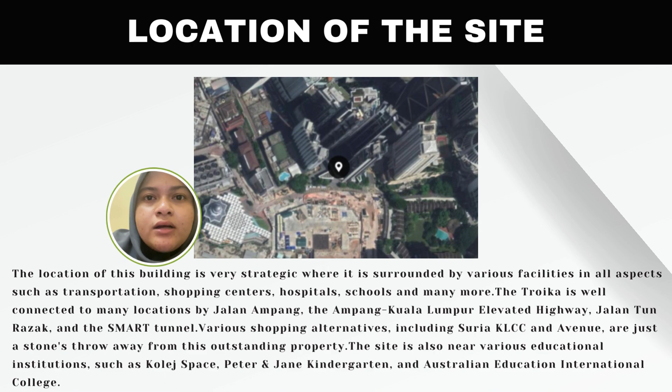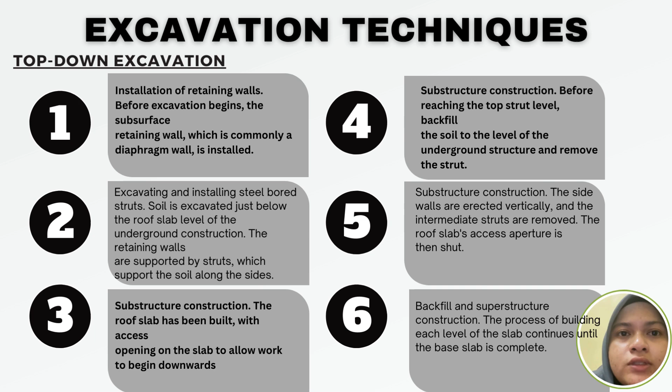For the Troika excavation techniques, we use top-down excavation, which firstly involves installing the retaining walls, then excavating and installing steel bored struts, then construction of the substructure. Following this, the roof slab is built with access openings on the slab to allow work to begin downward.

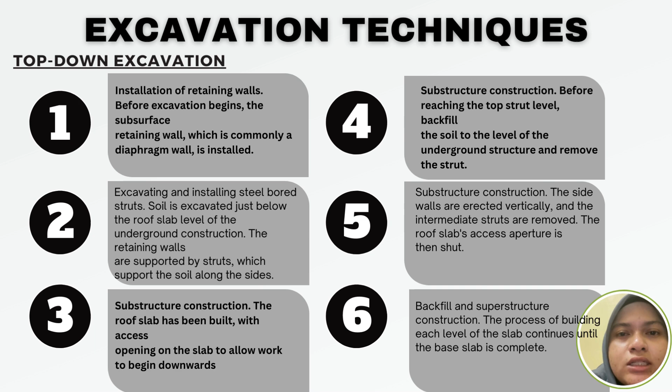Next, for substructure construction, before reaching the top strut level, backfill the soil to the level of the underground structure and remove the strut. Next, the side walls are erected vertically and the intermediate struts are removed. The roof slab's access aperture is then shut. Lastly, backfill and superstructure construction take place. This process of building each level of the slab continues until the base slab is completed.

The Troika Towers in Kuala Lumpur, designed by famous architect Norman Foster, contain innovative waterproofing systems critical to the structural stability and durability of the structures. Given Kuala Lumpur's tropical rainforest climate and heavy rains, strong waterproofing techniques are required. These systems likely involve a number of strategies specific to different areas of the structure.

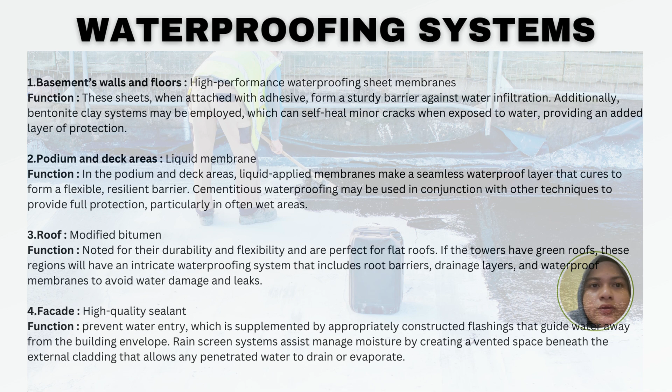For the waterproofing system at basement walls and floors, we use high-performance waterproofing sheet membranes. At the podium and deck areas, the tower uses liquid membrane. For the roof, modified bitumen is used, and at the facade, high-quality sealant is used.

The HVAC system efficiently maintains temperature and air quality throughout the facility. For ventilation, the Troika Tower most likely uses both natural and mechanical ventilation. Natural ventilation could be improved using architectural components such as movable windows and balconies that encourage airflow.

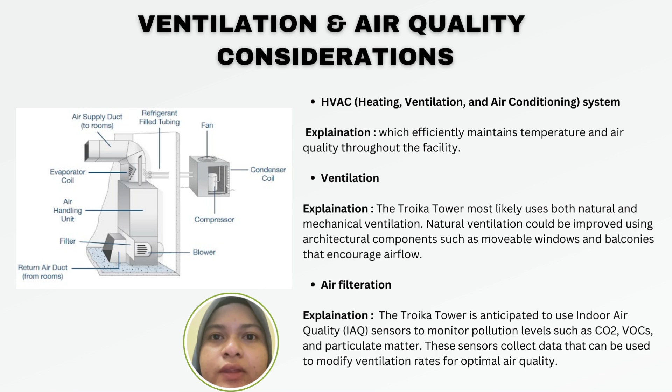Next, for air filtration, this tower is anticipated to use indoor air quality (IAQ) sensors to monitor pollution levels such as CO2, VOCs, and particulate matter. The sensors collect data that can be used to modify ventilation rates for optimal air quality.

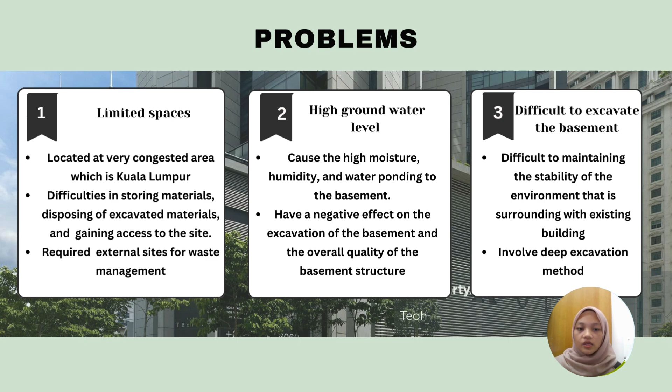The last problem is difficulty excavating the basement. It is difficult maintaining the stability of the surrounding environment with many existing buildings nearby. It also involves the deep excavation method and a lot of effort.

Okay, let's move to the solution. The problem of limited space area can be overcome by doing proper site layout planning. Effective site design helps to maximize the utilization of the available area, ensure safety, reduce the chance for delay, and reduce disturbance during construction.

Next is installing a waterproofing system. It can help overcome the problem of high groundwater level. It is important to install a waterproofing system to avoid water coming up into the basement.

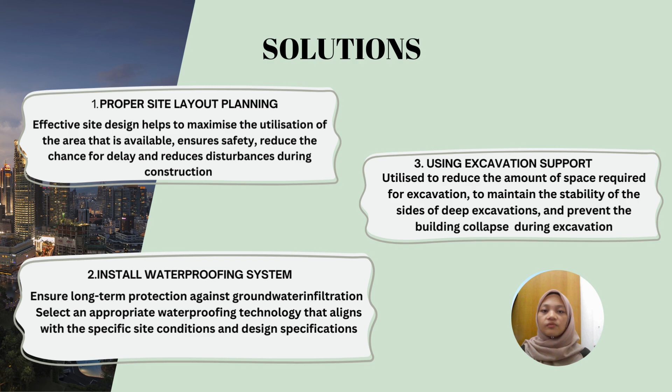Next is using excavation support, which can overcome the problem of difficulty excavating the basement. Excavation support is utilized to reduce the amount of space required for excavation, to maintain the stability of the sides during deep excavation, and to prevent building collapse during excavation.

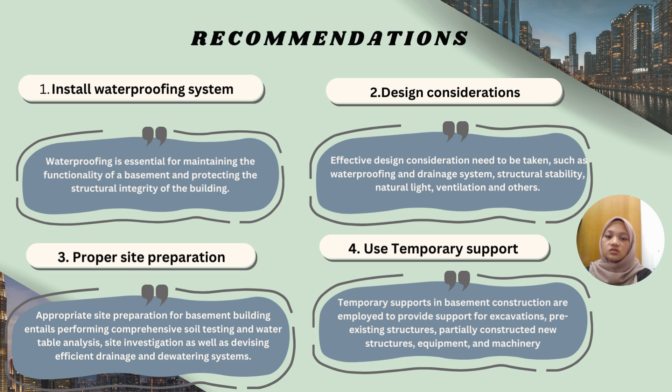Appropriate site preparation for basement building involves performing comprehensive soil testing, water table analysis, site investigation, and others. Lastly, I recommend using temporary support. Temporary support in basement construction is employed to provide support for excavation, protect pre-existing structures, and prevent collapse of the building during excavation.

This slide shows the location of the site, and this image shows the site layout plan. The project is situated in the Tun Razak Exchange (TRX) area, a premier financial district in Kuala Lumpur, Malaysia.

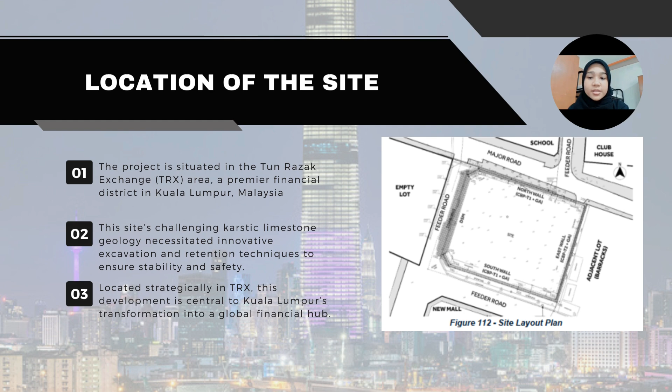This project involved the construction of the Exchange 106, one of the tallest skyscrapers in Southeast Asia. The site's challenging karst limestone geology necessitated innovative excavation and retention techniques to ensure stability and safety. Located strategically in TRX, this development is central to Kuala Lumpur's transformation into a global financial hub.

This slide talks about the excavation techniques. First of all is open excavation. The primary technique used to handle the site's complex karstic limestone geology was open excavation. Using this strategy, the site was carefully excavated in phases down to a depth of 16 meters, while continuing to be tracked to adjust to the very unstable and changing karst characteristics.

To maintain the vertical sides of the excavation and prevent collapse, a complete retention system including diaphragm walls and contiguous bore piles was built throughout, despite the difficulties involved with the geology.

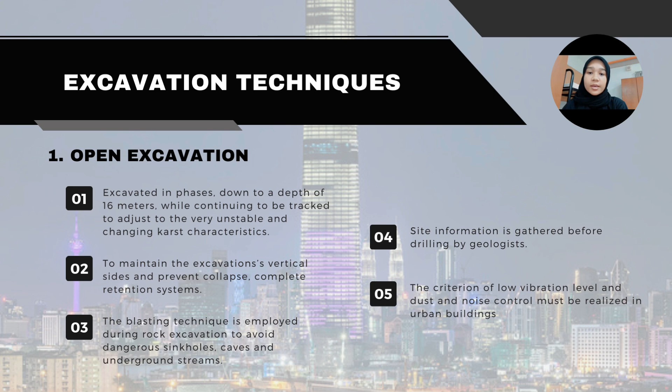Blasting technique is employed during rock excavation in order to avoid dangerous sinkholes, caves and underground streams. This method entails control blasting in order to fracture the rock without inflicting much damage on surrounding structures and unnecessarily inconveniencing the society. Site information regarding the subsurface conditions are gathered prior to drilling by geologists.

The second is about the retention method. For shallow rock heads and contiguous bore piles (CBP), a design involving deep soil mixing (DSM) was suggested. It was suggested that one uses CBP with obtainable ground anchors in situations where DSM would not be appropriate due to deeper rock heads and/or lack of space.

The application of DSM was reviewed where space was available on the west and south walls. To map the rock profile at these walls, sufficient rock drilling was done. It was determined that DSM is the best use for the west wall since the rock profile was less than 10 meter and more uniform. Since the rock depth on the south wall varied from 8 meter to 9 meter, it was determined that DSM would not be a good option.

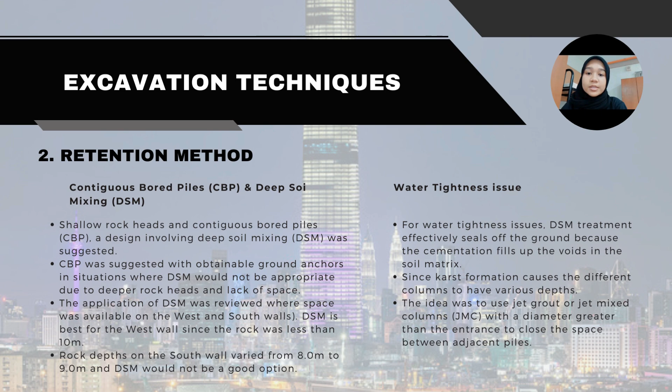For the water tightness issue, the DSM treatment effectively seals off the ground because the cementation fills up the voids in the soil matrix. Since the construction techniques, soil nailing was important in strengthening the excavation walls by driving steel bars and grouting them for stabilization of the slope and to prevent failures in the event of excavation slopes. Dewatering was accomplished by installing deep well points to lower groundwater levels and pumping equipment system to control groundwater levels.

Open pit methods were employed in the excavation process as in similar sites. However, the actual digging was done in benches to reflect the varying ground conditions at the site. Blasts were also used in the instance when the hard rock had to be broken to ease the digging process.

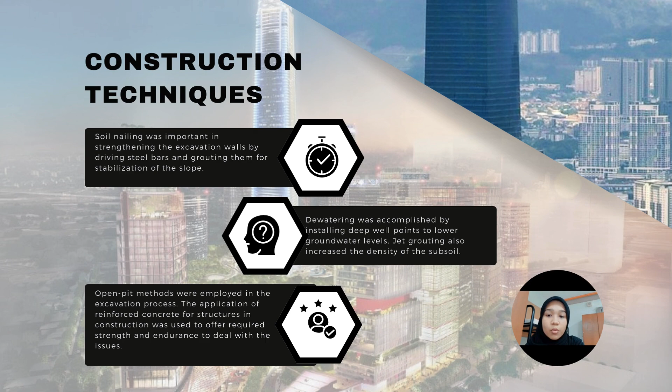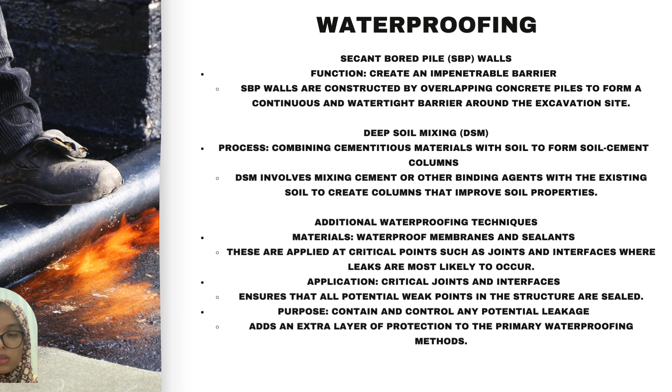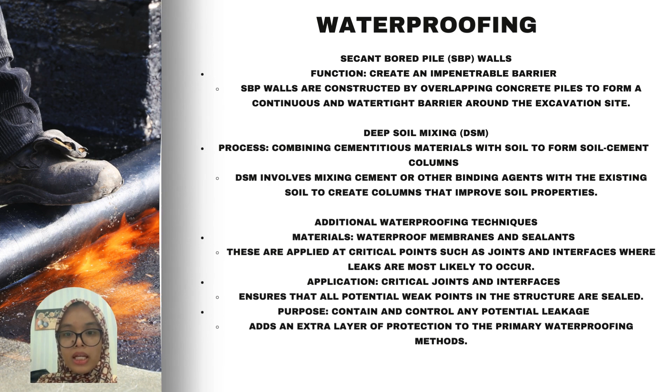First, waterproofing method. They use several methods to waterproof the excavation site effectively. The primary technique includes secant bored pile (SBP) wall, deep soil mixing and additional waterproofing technique. Firstly, they use SBP wall. This wall creates a strong waterproof barrier around the excavation site.

They prevent water from seeping in and provide crucial structural stability. Secondly, they employ DSM. This process involves mixing cement with the existing soil to form soil cement columns. This column stabilizes the soil and reduces the permeability, which is vital in preventing water leakage into the excavation area.

Lastly, they implement additional waterproofing technique to address any potential weakness in the primary system. This includes applying waterproof membrane and sealant at critical joints. These extra measures ensure that even the smallest leaks are contained and controlled.

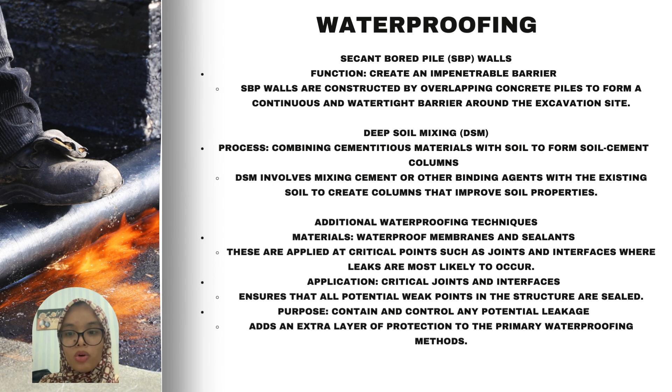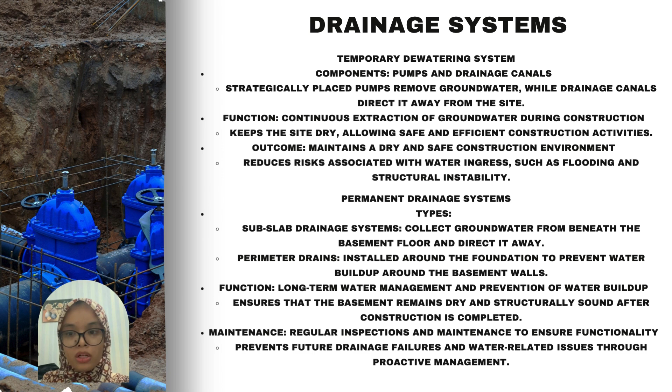Next is drainage system. Efficient drainage systems were crucial for managing groundwater and preventing flood. During construction, they used a temporary dewatering system with strategically placed pumps and drainage canals to keep the site dry. After construction, they installed permanent drainage system, including sub-slab and perimeter drain. This system continuously manages water to prevent any build-up around the basement, ensuring long-term dryness and structural integrity.

Next is the problem. They faced several challenges during the project. The geological variability of the karst formation made excavation unpredictable, with rock depth varying between 6 and 19 meters. Additionally, the high permeability of the karst limestone allows significant groundwater ingress, complicating water management.

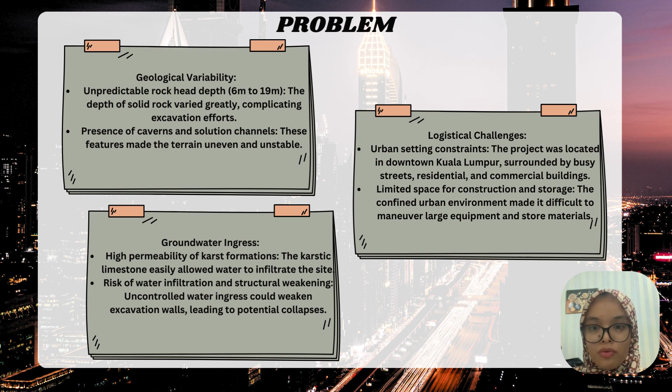Furthermore, the urban setting in downtown Kuala Lumpur posed logistical challenges. The site was surrounded by busy streets and buildings, limiting space for construction, operation, and storage. To address these challenges, they used a combination of SBP wall and DSM to stabilize the soil and manage water ingress. The SBP wall created a seamless barrier, while DSM reinforced the ground and reduced permeability.

The first solution is dewatering system. A comprehensive dewatering system with pumps and drainage canals was put in place to control groundwater level during construction. This system keeps the site dry and safe.

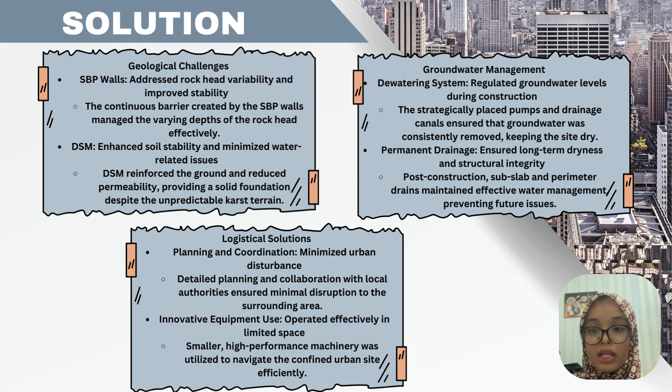Second, permanent drainage. Post-construction, they installed permanent drainage system to ensure the basement remains dry and structurally sound. This includes sub-slab and perimeter drain. Lastly, logistical solution. They also tackled the logistical challenges by carefully planning and coordination to minimize urban disturbance. They use smaller, high-performance machinery to operate effectively in the limited space.

Next, recommendation for improvement. First, enhance drainage design. Consider including a redundant drainage layer and backup system to ensure continuous water evacuation. Additional drainage channels and extra sump pumps can act as fail-safes.

Second, cutting-edge waterproofing solutions. Employ high-performance membranes and advanced sealants. Modern waterproofing materials and self-healing sealants provide greater durability and flexibility, effectively accommodating the variable nature of karstic landscape.

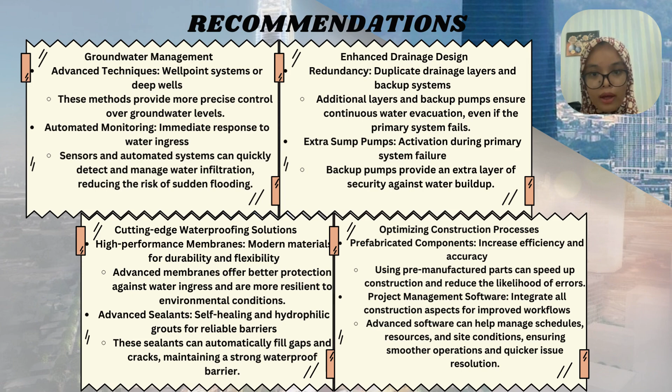Lastly, optimizing the construction process. They can use prefabricated components and sophisticated project management software. Prefabrication increases efficiency and accuracy, while advanced software helps manage all aspects of the construction process, ensuring smooth operation.

Okay, let me continue with the comparison between the two projects. As for similarity, the first similarity between the KL Karst and the Troika is both provide the same function to the main building, which is to act as parking.

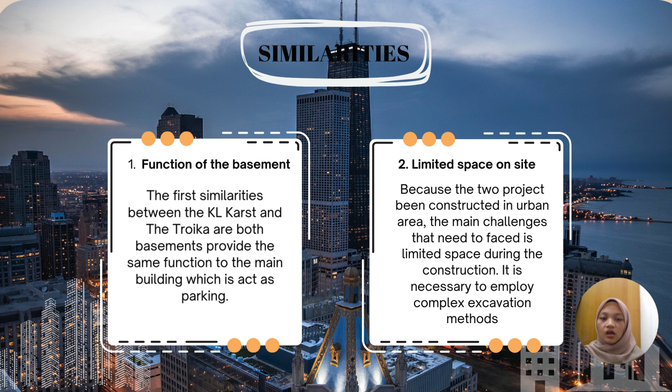Next is limited space on site. Because the two projects are being constructed in an urban area, the main challenge that needs to be faced is limited space during construction. The projects are required to employ complex excavation methods.

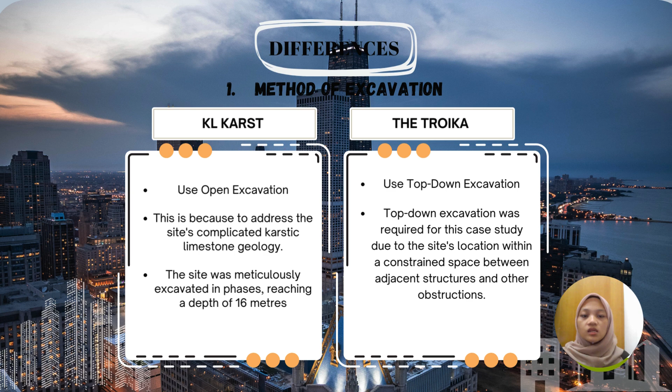Next, differences. The difference between KL Karst and the Troika is the method of excavation. KL Karst uses open excavation to address the site's complicated karstic limestone geology. Meanwhile, the Troika uses top-down excavation because the site location is within a constrained space between adjacent structures and other obstructions.

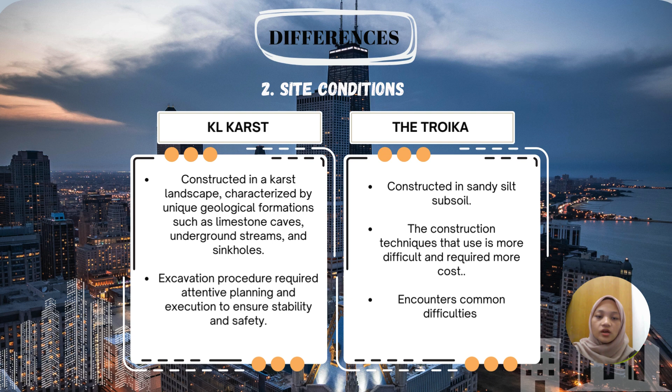Next, site condition. KL Karst is constructed in a karst landscape, characterized by unique geological formations such as limestone caves, underground streams, and sinkholes. Excavation procedures require attentive planning and execution to ensure stability and safety of the basement. Meanwhile, the Troika is constructed in sandy silt subsoil. The construction technique used there is more difficult and requires more cost.

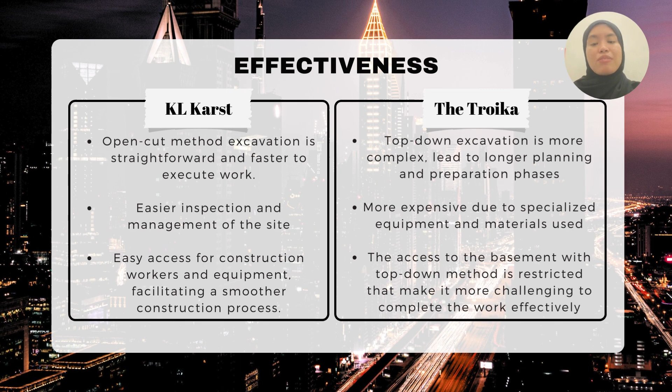I am Fatih Zulaika and I will be presenting the next topic, which is the comparison in effectiveness between the KL Karst and the Troika. First of all, the term effectiveness refers to how effective the method is, where we can see the successful outcome of the project from the best method or application used in the construction process.

From the KL Karst project, the open cut excavation method is used, which is more straightforward and faster to execute. It provides easier inspection and management of the site. Moreover, it has easy access for construction workers and equipment, which facilitates a smoother construction process.

As we can see from the Troika, the method of excavation used is the top-down method. It is a bit less effective due to its complexity, which may lead to longer planning and preparation phases. Next, this method is quite costly since it requires specialized skills, equipment, and materials. Furthermore, the restricted space makes it quite difficult and challenging to complete the work effectively.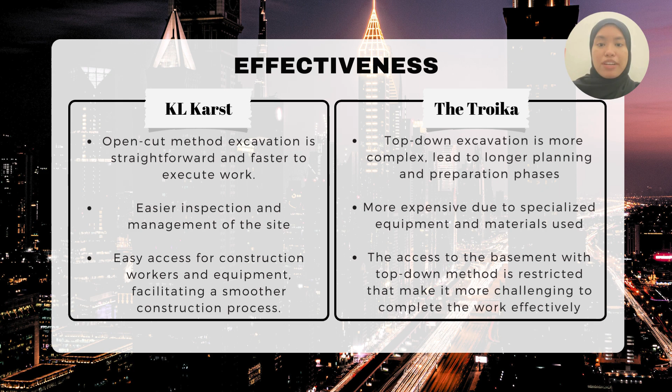Next, I will be sharing the efficiency between the KL Karst and the Troika projects. Efficiency means the ability to accomplish something with the least amount of wasted time and money, with competency in performance.

For the KL Karst project, it has unforeseen subsurface conditions that lead to increased or additional expenses during construction. Furthermore, the site condition has unexpected karst features, causing the project to delay and extend. Additionally, this project's safety measures may not account for all site-specific risks.

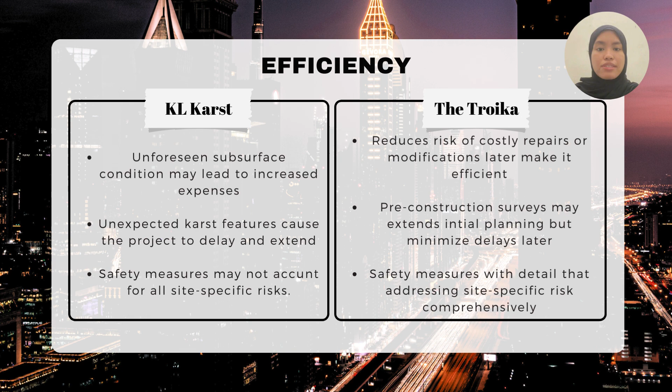Now, for the Troika project, the construction site condition is able to reduce the risk of costly repairs or modifications later, making it efficient. Moreover, pre-construction surveys were made, which may extend the initial planning but are able to minimize delays later. The Troika project also provides safety measures in detail that address site-specific risks comprehensively.

Now, the cost analysis identified from the case study, for the KL Karst project: since the open cut excavation method was used for its basement excavation, it has higher preliminary costs for geotechnical assessments and stabilization measures. It also includes additional expenses for logistics and coordination for the excavation. The specialized techniques and materials required to handle the karstic condition make it costly.

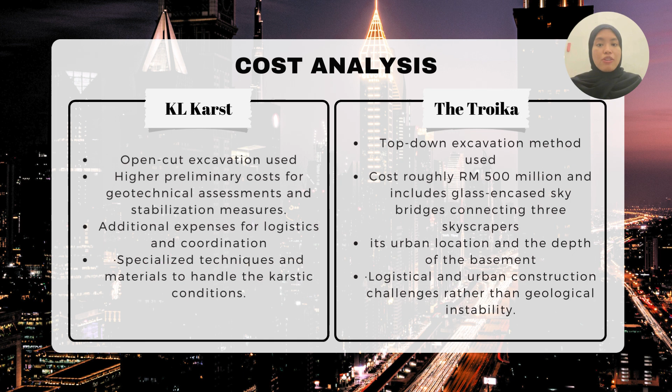For the Troika project, the top-down method of excavation for the basement costs roughly RM 500 million. With its urban location and the depth of the basement in the middle of the city, it requires more work, which might add additional work and expenses during the construction process. The cost analysis for this project identifies logistical and urban construction challenges rather than geological instability.